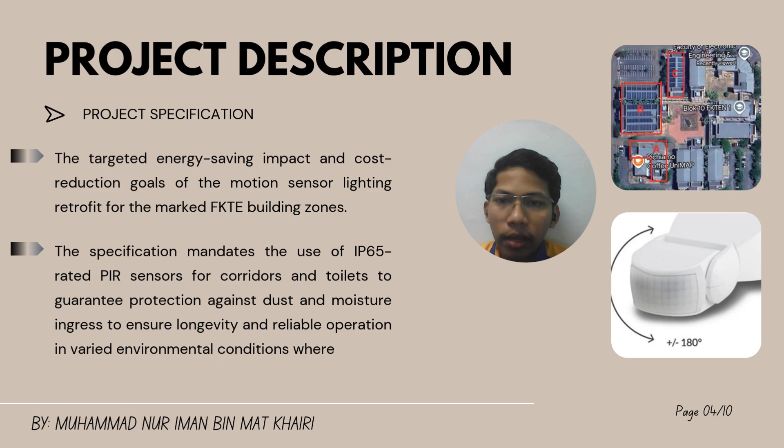The IP65 rating is not negotiable. It guarantees complete protection against dust and water jets. They ensure longevity and reliable operation in our campus environment, making the system durable and effective from day one.

This specification enables our three core objectives. First, to achieve 30 to 40% reduction in lighting electricity consumption. Second, to enhance operational efficiency through full automation, minimizing the need for manual control. And third, to directly lower UniMAP's carbon footprint and utility expenses, supporting our institutional Green Campus initiative.

Okay, finally our project scope ensures a complete professional outcome. We are delivering a full turnkey system, from the initial energy audit and design through to installation and commissioning, ending with final documentation. This end-to-end approach is how we guarantee quantifiable energy saving and provide lasting support for UNIMAP's sustainability goal. Thank you.

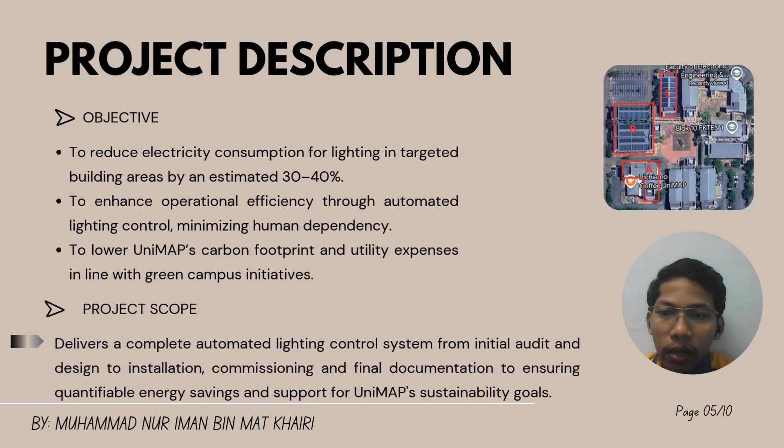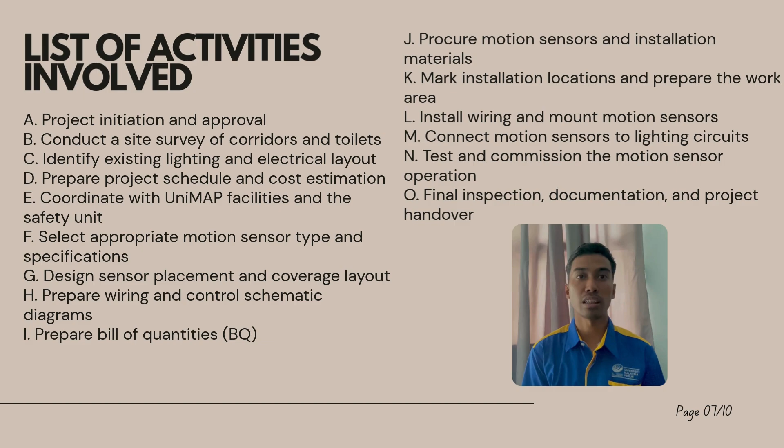Here is the project activities and schedule. Each activity is arranged based on logical sequence and dependency. The schedule helps ensure the project is completed on time while considering realistic working duration and coordination requirements.

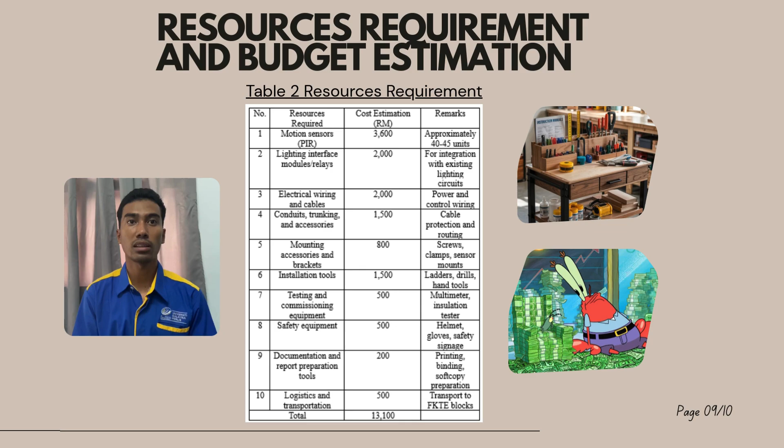This slide represents the resources required for the project, including manpower, equipment and materials. Proper resource planning is important to avoid delay and cost overrun. These resources directly support the execution and installation phase of the project.

This slide shows the project master schedule divided into initiation, planning, execution, validation and launch phases. The linear responsibility chart clearly defines roles and responsibilities for each activity. This helps improve coordination, accountability and communication among the project team. So this is our linear responsibility chart.

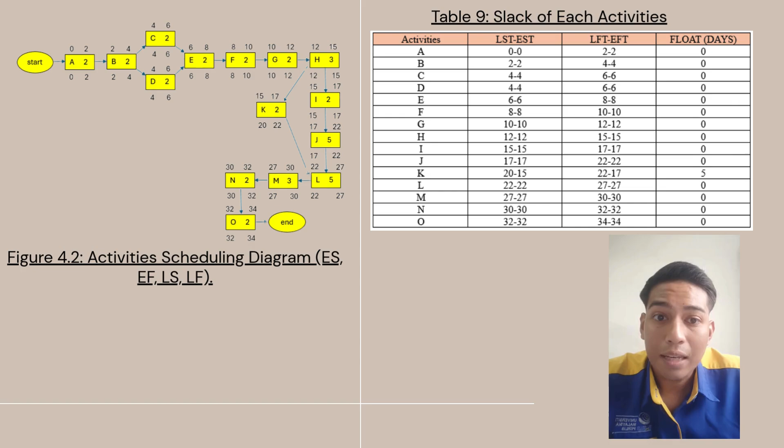So basically here is a network diagram. Based on the table, the slack of each activity shows how much delay an activity can have without affecting the project. Most activities have zero slack, meaning they must be done on time. Only activity K has a slack of 5 days.

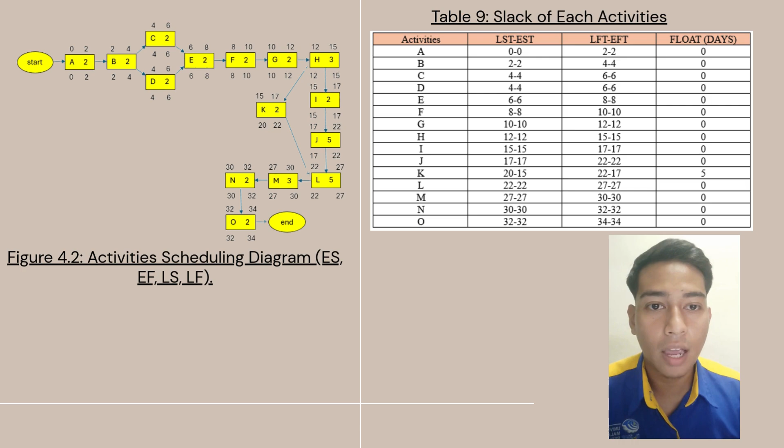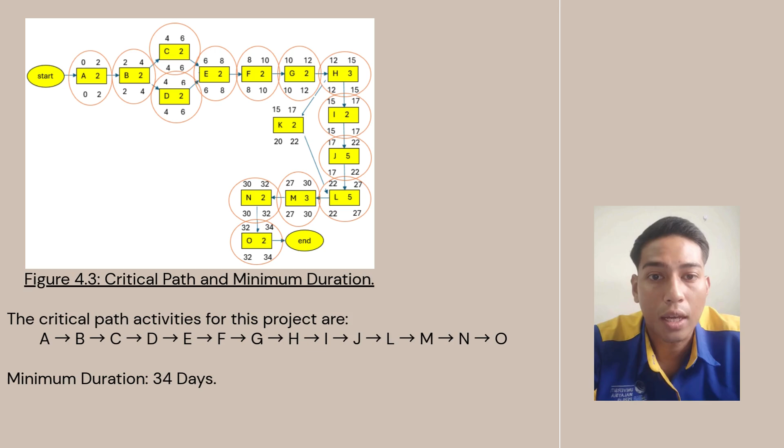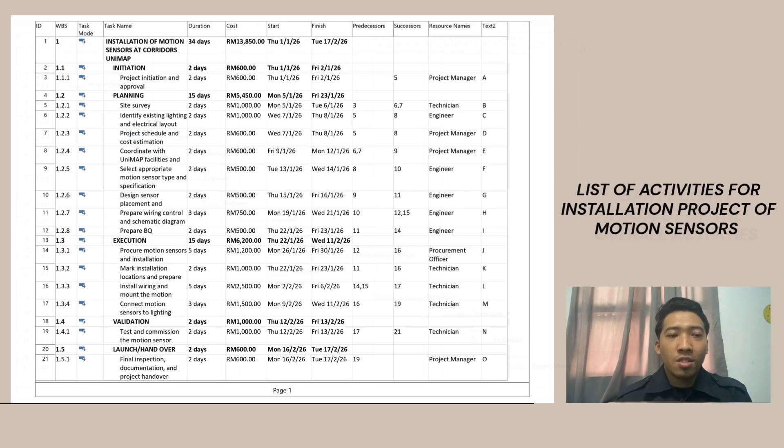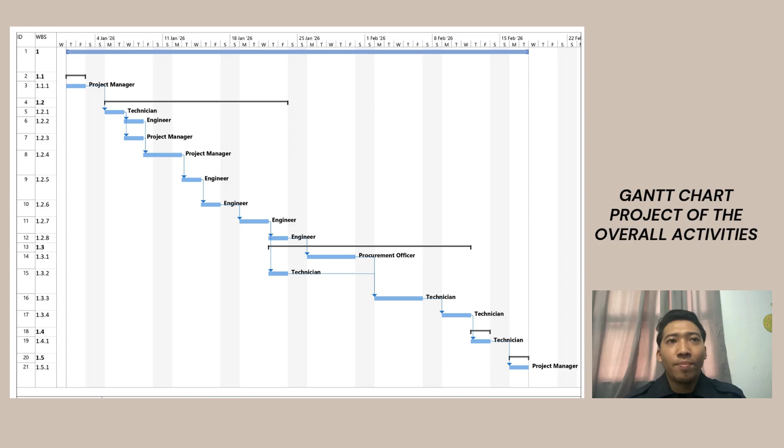This project has positive impacts on both society and the environment, and it is well aligned with the Sustainable Development Goals. First, from an environmental perspective, it supports SDG 7, affordable and clean energy, by reducing unnecessary electricity consumption through automated lighting systems. This reduction in energy usage helps lower carbon emissions and promotes more efficient use of electrical resources.

In addition, the project aligns with SDG 12, responsible consumption and production, as lighting is only activated when occupancy is detected. This eliminates energy wastage in low occupancy areas such as corridors and toilets, and encourages responsible energy consumption within the university.

From a societal perspective, the project improves user safety and comfort by ensuring adequate lighting when spaces are occupied, and at the same time reduces operational and utility costs of UNIMAP. These cost savings can be redirected towards academic development, research activities, or student facilities, creating long-term benefits for the campus community.